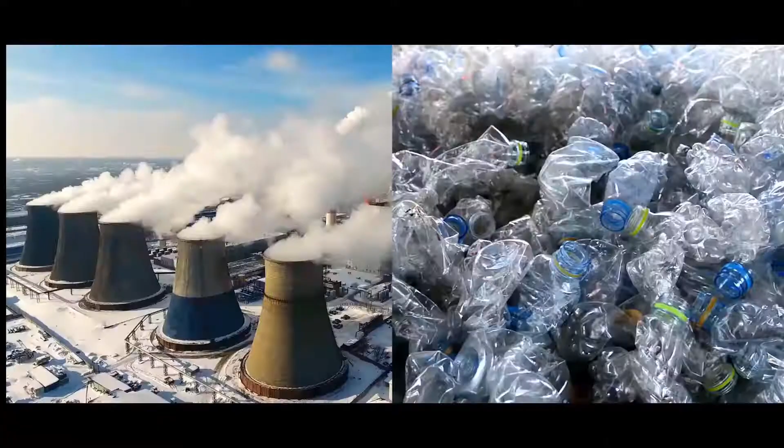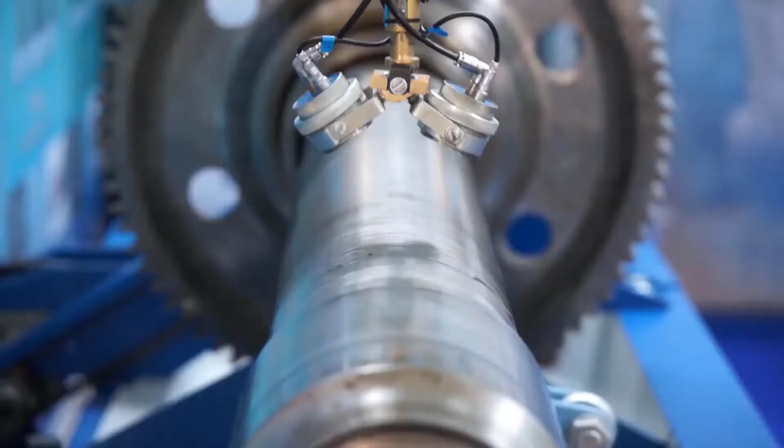Look at the most critical issues facing our planet, what do you see? As a bold, unified One Emerson, we see these issues as noble causes, and within each of them, opportunities to focus our core strengths and unleash new possibilities.

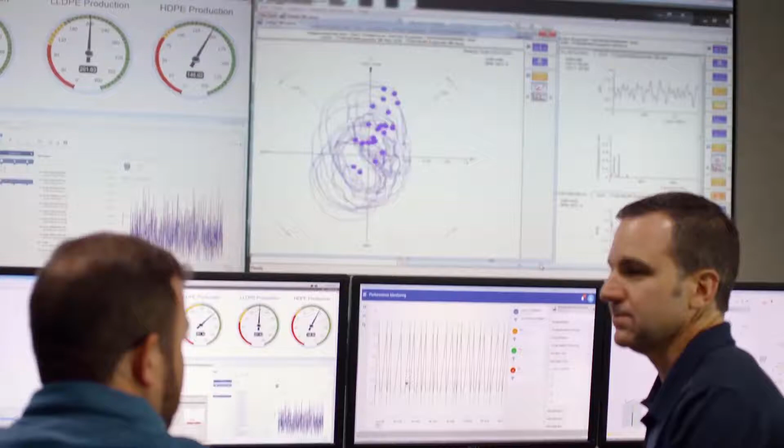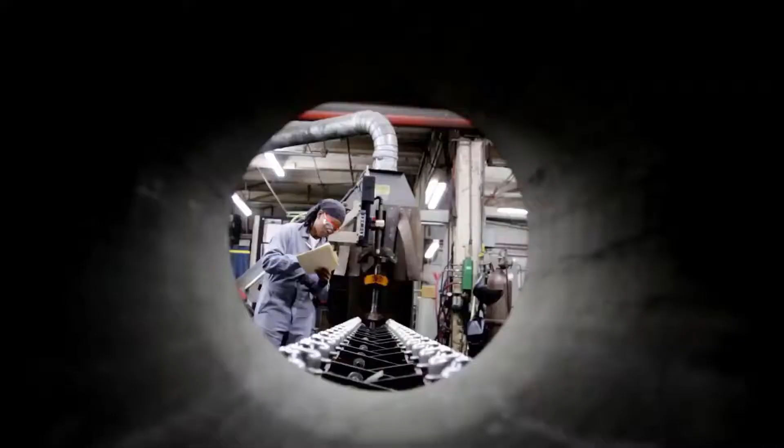With our innovative technology, deep expertise, and ability to deliver practical digital transformation solutions, the success of our Automation Solutions platform is providing real results for our customers while still protecting our planet. We see our most valuable resources being put to greater use, ensuring the performance and safety of industries that are the backbone of daily life.

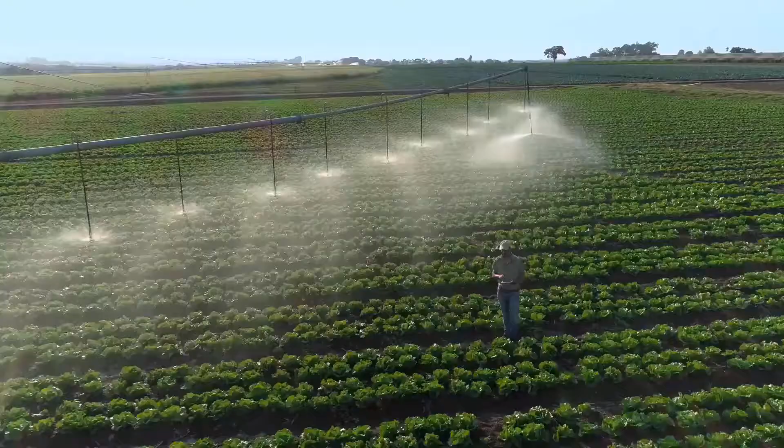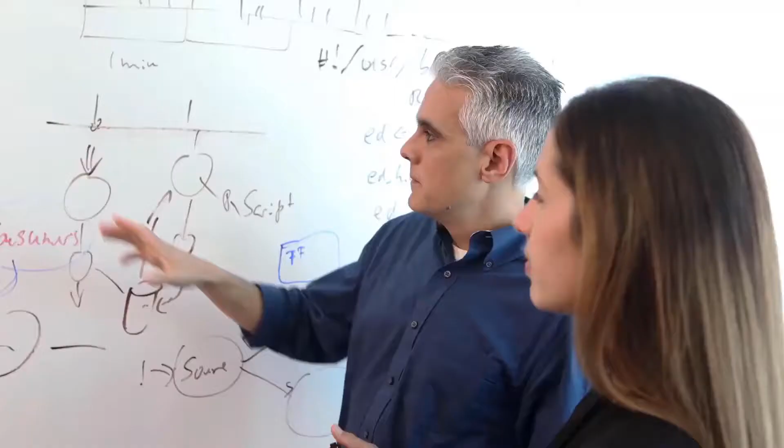From our commercial and residential solutions platform, we will continue to push the boundaries of purpose-driven innovation, identifying new growth opportunities. We see a future where better food quality, sustainable infrastructures, and advanced energy efficiency ensure comfort and health for everyone. As One Emerson, the momentum of our successful transformation into two focused platforms will continue to reshape industries and redefine success for our customers.

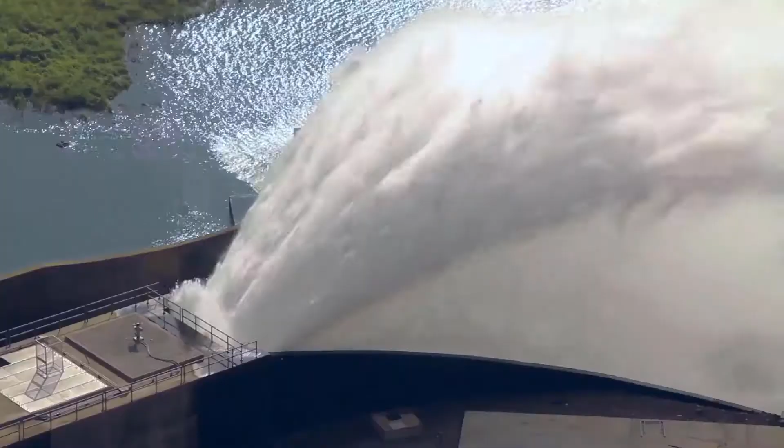We will unleash new possibilities for a future of greater productivity and prosperity, and strengthen our customers' belief that when they partner with Emerson, they can always consider it solved.

Hello everyone, Don Gillis from Emerson. I'm going to be discussing compressor modulation today with you. It's a two-part series. We're going to talk about two-stage, variable, tandems and trios, and also going to get into the digital side of things, okay?

So bear with me, let me take time here to pull my screen up and share it with you. Okay, again I'm Don Gillis with Emerson. This is going to be our virtual classroom. We're going to be talking about capacity modulation today, all right?

A little bit about myself. Again, I'm Don. Joined Emerson in July of 2017. I have approximately 28 years of experience, roughly. I've been an installer, a service technician, a service manager. Obviously I've done some tech support, and I am a full-time HVACR instructor for Emerson.

I am a licensed journeyman. I've served on the Heating Advisory Board for Ivy Tech Community College. I now sit on UNOH Heating Advisory, also on Hi-Point in Bellefontaine, Ohio, and so on and so forth. Most of you probably know, if you're instructors, I've spoke at RSES National Conference a couple times, and as we're doing right now, the HVAC educators, I've done a couple times in Vegas, okay?

Most of you might already know this, the students may not, okay? Some of you instructors, if not all of you, probably already know where I'm headed with this, but I think it's important to point out just a few things about the scroll that I think will make better sense when we get into the modulation part, when I start using some terminology, all right?

All right, so just so you know, I'm not going to go into all the details about the scroll set because this is about modulation, but I do want you to understand some of the moving parts in here. I think it's important for us to have this conversation prior to getting into modulation, okay?

The very top of this is your tips, the sides is your flanks. This is the Oldham coupling, and the Oldham coupling, moving back here, is what keeps this aligned, all right? These notches, all right?

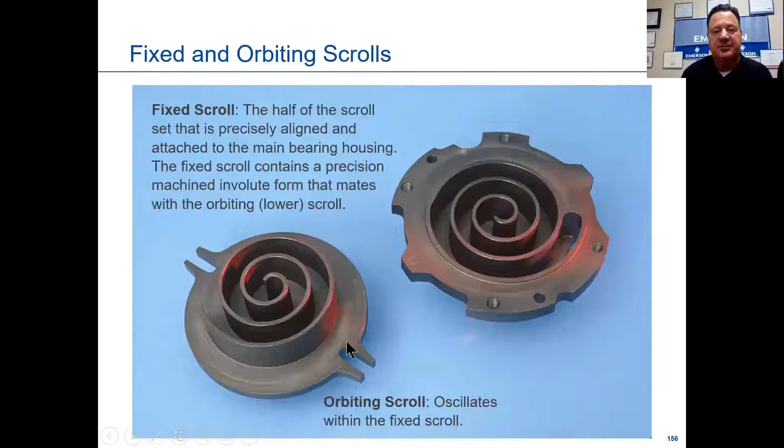And let's say this is the orbiting scroll on these two pegs, this is the fixed scroll on these two pegs. And it basically, not basically, it keeps it from going out of alignment. I'll show you, put this together here a little bit.

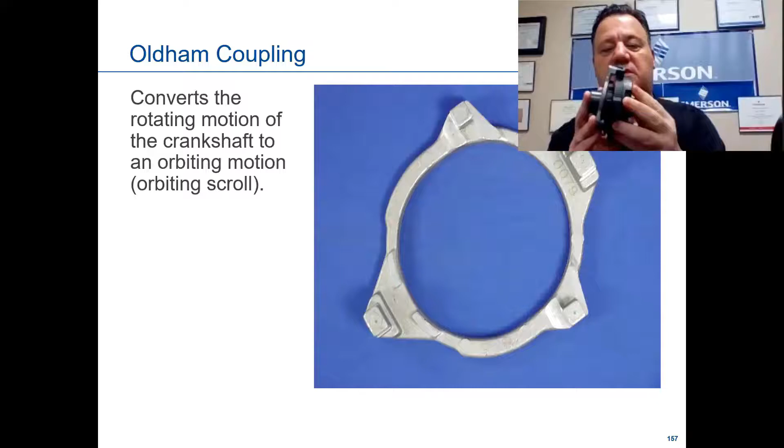Okay, so that's how it looks. I've got the Oldham coupling on these scroll sets, and it's going to go in like this, move around, and compress that gas along those flanks on the side.

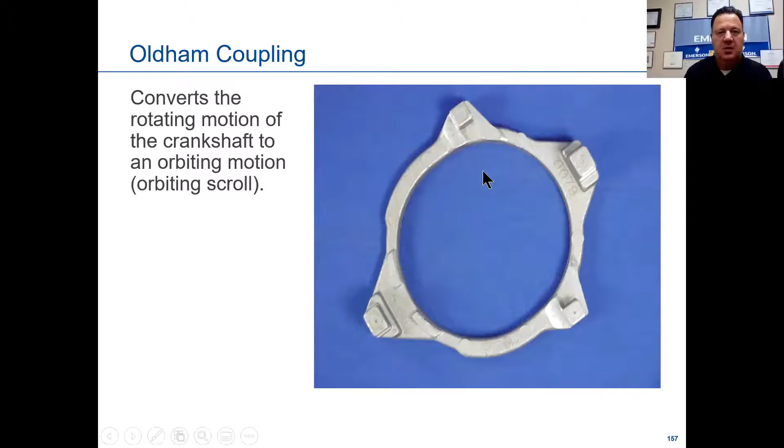All right. This is what we call radial compliance. To me, it's just as simple as saying we're horizontal movement, side to side, and what allows the scroll set to tolerate if you were to get a liquid droplet, if you will.

So it's much more tolerant than, let's say, a reciprocating compressor is. It doesn't mean it will take liquid refrigerant, by no means, but it does help tolerate it quite a bit if in fact it gets inside there.

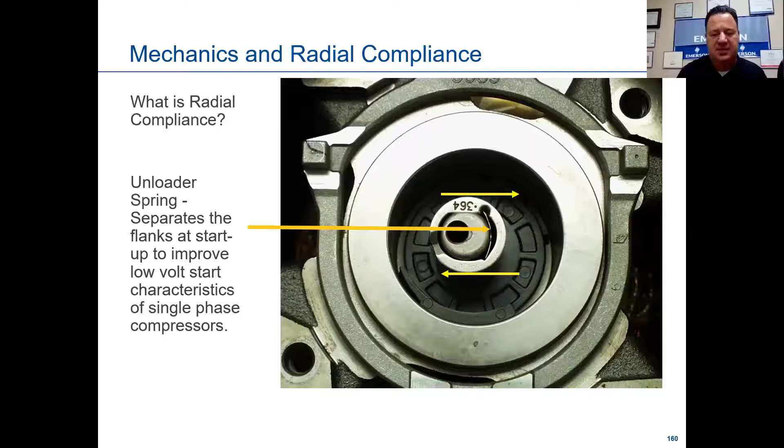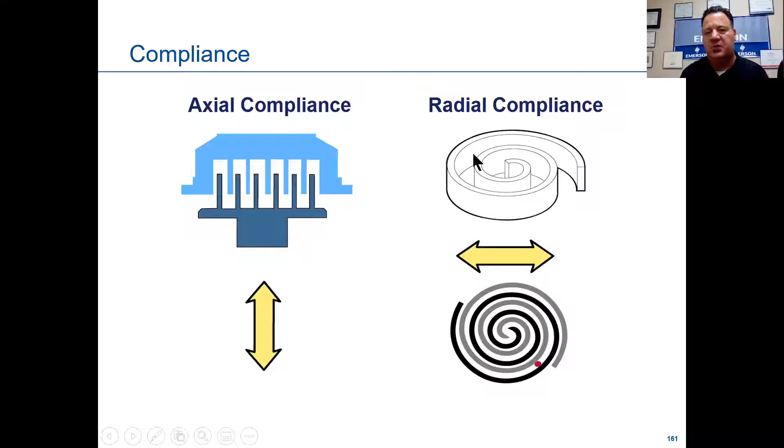This is the radial compliance where I showed you that piece of Swedish steel earlier. This is real important to understand, and this is why I wanted to talk a little bit about the moving parts and just the basic fixed scroll before we get into modulation.

The scroll starts out unloaded, okay? It's a 2-pole motor, runs at 3,500 RPMs roughly nominal. When it starts to load up, as the gas starts to get in, the contactor pulls in, we have a little bleed port here, and as this starts to pressurize on the scroll...

The way this floating seal works - this is a large one on the top of it, and it sits right there on top of that fixed scroll I showed you earlier. The bleed port allows gas to get in that cavity. This is normally sitting on that ledge there.

What happens is 2 things are going on there. It pressurizes that cavity, causing this floating seal to push up on the muffler cap, but it also allows the fixed scroll to go down with the tips of those scrolls touching, okay? That pressurizes it and pushes that 1 millimeter.

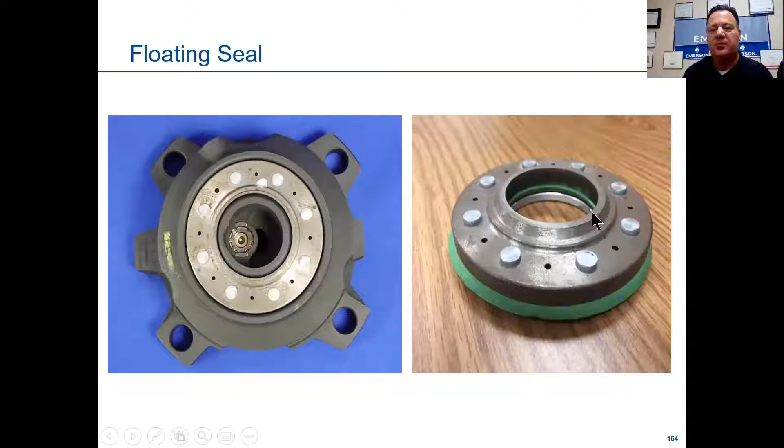This plays an important part because it separates that gas, as we talked about earlier. When this pushes up to that muffler plate, it doesn't allow that discharge gas to go over the top of it, so it isolates it, forcing it to go out the top above that muffler plate and at the top of the scroll compressor.

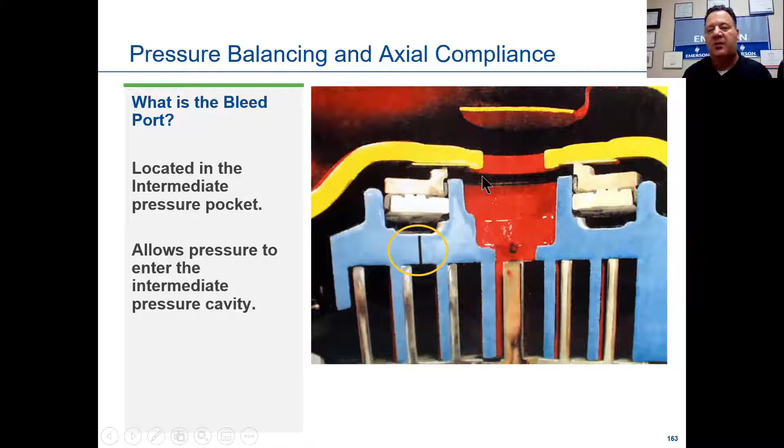If this were to fall down, and I'll get into that later on, this gas would then come around and re-enter that suction gas.

Over here is what we call sleeve guides on the right-hand side. That is allowing that 1 millimeter separation when we load and unload, when we get into digital. When I refer to that 1 millimeter on that sleeve guides, this is what I'm talking about, and we'll get more into that as we move along.

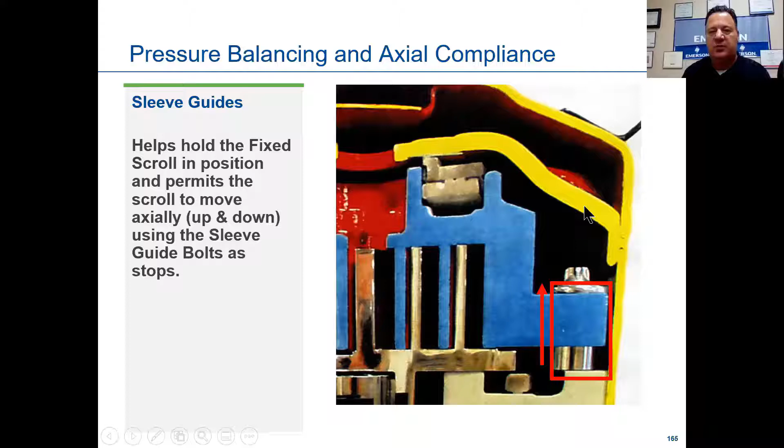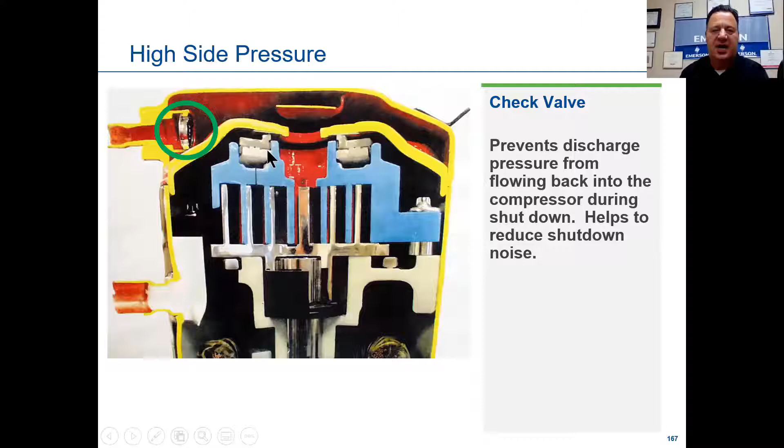This is just showing you a check valve. Most all compressors or scroll compressors have check valves in them. They range from anything inside the discharge line as it moves out, leaving the compressor, to dead center, right in the heart of the compressor at the hottest point of the compressor in the discharge port.

Some may have 2. All right, let's start in with the capacity modulation. We're going to talk about 4 specific modulations: 2-stage, variable, digital, and then multiples, tandems, and trios. All right, let's walk through these here.

So capacity control modulation methods, and we'll walk through each one of these. Two-stage, just a 30,000-foot view here at the beginning, is full capacity - obviously 100%. It is like a fixed scroll, if you will. That will be your second stage at 100%. Obviously, 67% or 65%.

Two-thirds of the capacity will be your first stage, and I'll show you how that works. Then to the top right, we have variable speed, customized scroll with variable frequency drives. We'll talk about the drives and how that works, because that's the one really catching on a lot in the industry right now.

I foresee that being a big major player, as it did with mini splits years ago. Then at the bottom left, we have digital, mostly seen in refrigeration, can be used in air conditioning too.

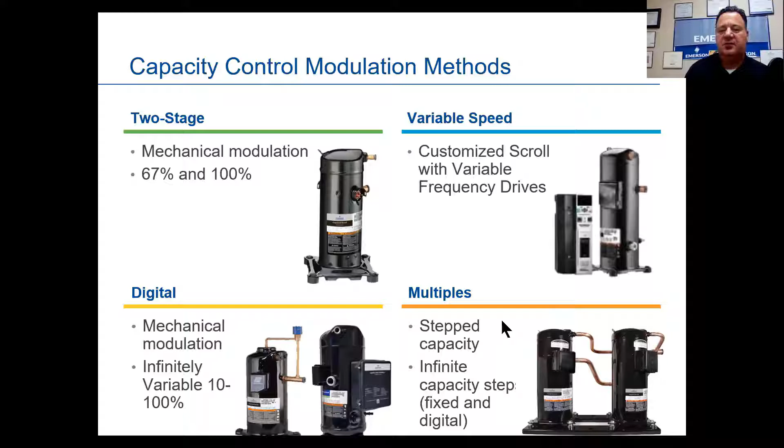Then we have multiple tandems or trios. It's a step capacity, infinite capacity steps, fixed and digital. So you can have two compressors. They don't have to be the same size, or even the same model. They can be different BTUs and different tonnage. So we'll walk through those.

Now, this is just a snapshot of the compressor modulation technology comparisons. I'm not going to spend a lot of time on this because it's more salesy marketing. I do show this in class, but it's really to give technicians an idea of what that might look like if they're quoting equipment.

So we have our fixed scroll. We talked about that a little while ago, just the anatomy pieces of it. We have the modulation technology on the top left, our products, the range, what horsepower they come in, the part load efficiency, full load efficiency, and what that looks like with comfort. Then we have our applied cost.

So again, we start out with fixed. We then have two-stage, digital from 10 to 100%, variable speed, and multiples. Now none of these compressors, with the exception of variable, have a pump for lubrication inside them. So that's unique to that.

If you're teaching scrolls, at least the Emerson scrolls, we do our lubrication basically by physics. We manipulate the shaft and different things in there and apply that lubrication up through the shaft simply by ramping up the 3,500 RPMs that a fixed scroll has.

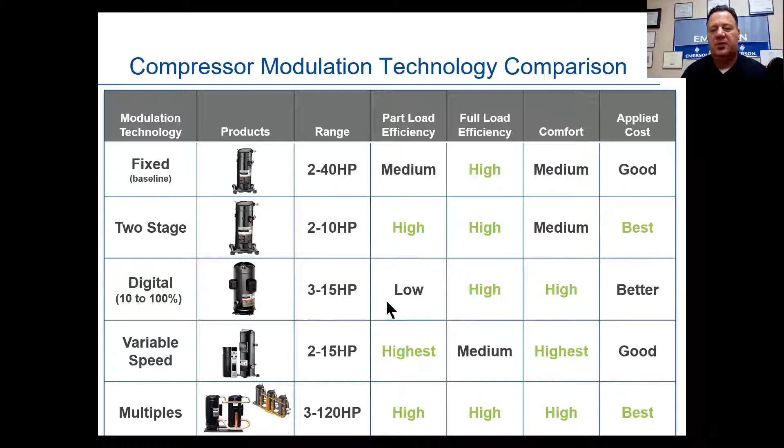The next one that I really think is a great technology, especially in refrigeration and air conditioning, that's catching on quite quickly is the digital. We unload and load that compressor. We don't necessarily shut it off. I'll talk a little more about that in a bit.

All right, the first thing we're going to talk about is our two-stage. Again, we're talking about 67, 65%. The reason I say 67, 65 is that on some videos Emerson's made it will say 67%, and some presentations I've seen will say 65%. Neither one is wrong. Just remember, first stage on a two-stage compressor is going to be about two-thirds capacity, so the 100% is like a fixed capacity, and partial capacity, or first stage, is going to be about two-thirds of 100%.

All right, so Copeland scroll two-stage, you can see how this is working. It's a module, if you will. Mechanically unloading compressor operates at 67% to 100%. It utilizes a three-way solenoid valve to pressurize the lift ring. In fact, I'm going to show you, this is part of that ring I was talking about at the very top.

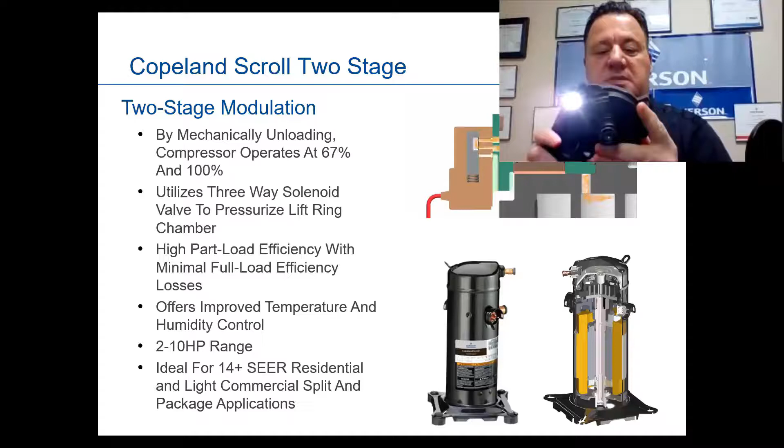I don't know if you can see this or not, let me try this again. You can't really tell, but there are three little holes in the top of the fixed scroll. There you go, you can see my light coming through there. There are three little bleeder holes on both sides, in the intermediate area of that fixed scroll. See my flashlight shining through there? Two little bleeder holes, so when those are at the very top, you can see it.

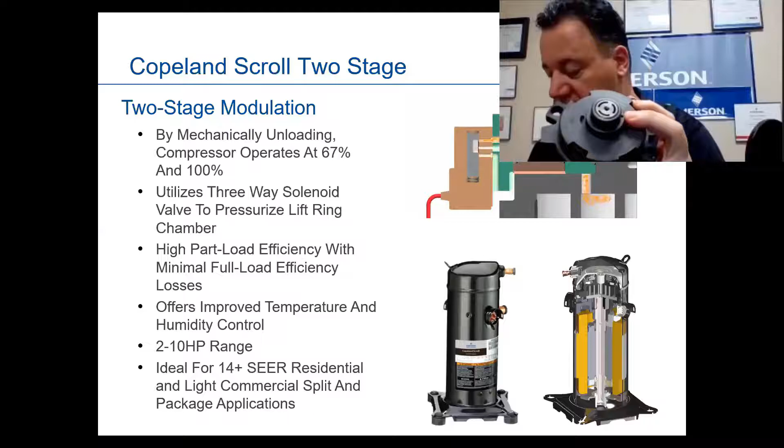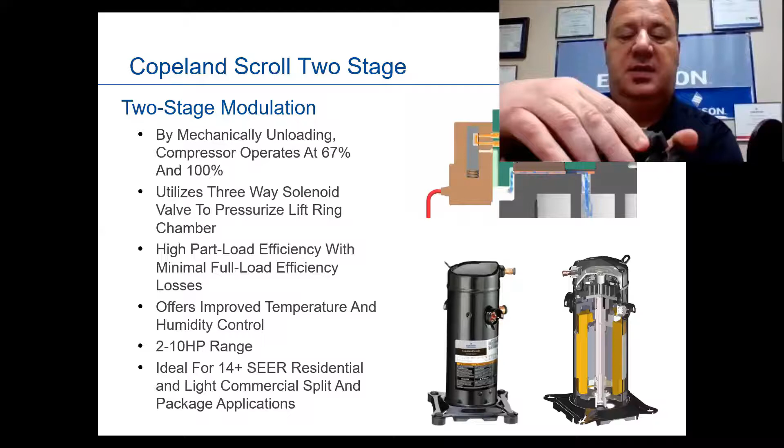High part load efficiency with minimal full load efficiency losses offers improved temperature and humidity control in the 2 to 10 horsepower range. Ideal for 14 SEER and above residential and light commercial split and package systems.

You see a lot of two-stage out there in residential and light commercial. For the most part, I haven't been gone all that long in the field, and two-stage is something most technicians are fairly familiar with. Do they know how to troubleshoot it? That might be a different story. I don't know, but they understand the concept of it.

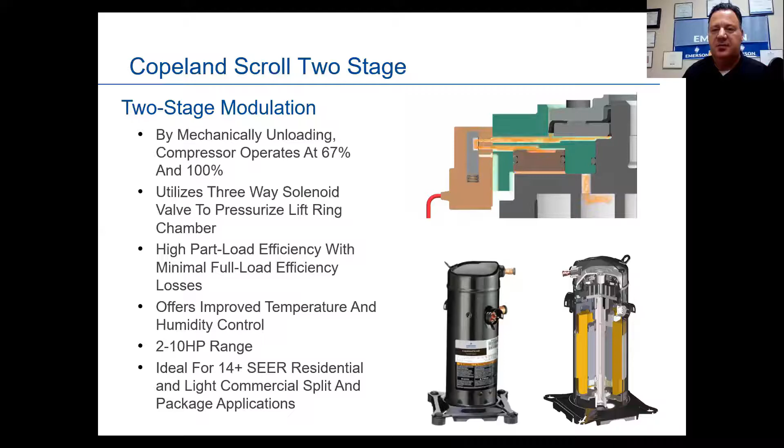Now, the Copeland Scroll two-stage modulation operation, at the very top, I'll start up here. Again, you're powered up. Now we're blocked off, we're at 100%, or here we're at partial. We energized, blocking it off. Now we're at full capacity. Here we're at 67%, you can see it's bleeding off.

Over here on the right, partial load operation: intermediate cavity pressure communicated to a lift chamber via a three-way valve. The valve is de-energized when we go into that first stage, as we talked about earlier. You can see that lifting up, that lift ring, that three-way valve lifts it up, and those bleed ports I showed you earlier in that medium cavity—here's the low, medium, and high pressure cavities—will bleed out from both sides. Modulation ring moves up, opening the bypass.

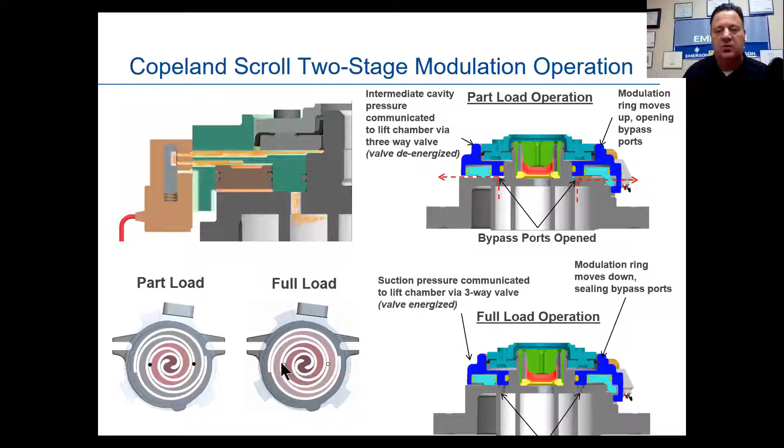At the bottom, you'll see full load operation, suction pressure communicated to the lift chamber. The valve is energized now at full capacity, at 100% or fixed capacity. You can see the bleed ports down here at the bottom on the left. Partial load, when it shifts, those open up. You can see at full load, those ports, if you will, are blocked off.

Here's our module. Now we're going to talk about multiples—that's tandems and trios. All we're doing is taking multiple compressors and mix and matching them. They could be uneven or even—in other words, they could be the same capacity on both compressors, or the trios could be the same capacity, the same BTUs, horsepowers, or they could be mix and match. They could have a digital on them. So there are all different opportunities here to best fit that application.

Let's take a look at this. This one is the easiest one to comprehend, because all you're really doing is matching up the load with multiple compressors.

What is a multiple? It's a pairing of two tandems or three trios, fixed speed and/or mechanically modulated scroll compressors, variable speed, digital two-stage compressors, to achieve capacity modulation. Multiples allow modulation of compression capacity while maintaining efficiency and potential reduction of cost, and you see a lot of this in commercial applications, some refrigeration applications. Very good stuff—won't see things like this in residential, obviously, but there is a place for it, and we sell a lot of these.

The only thing I want to point out to you, if you're an instructor and you're planning on teaching this, or at least touching on it, the thing I like to drive home when I'm delivering this out on the road is be aware that there's going to be multiple model numbers. Each compressor is going to have a model number, and the sled, the trio, or the twins will have a model number themselves. Either the tandem and the trios will have a model number, and that's crucial when you're ordering, to get the right model number.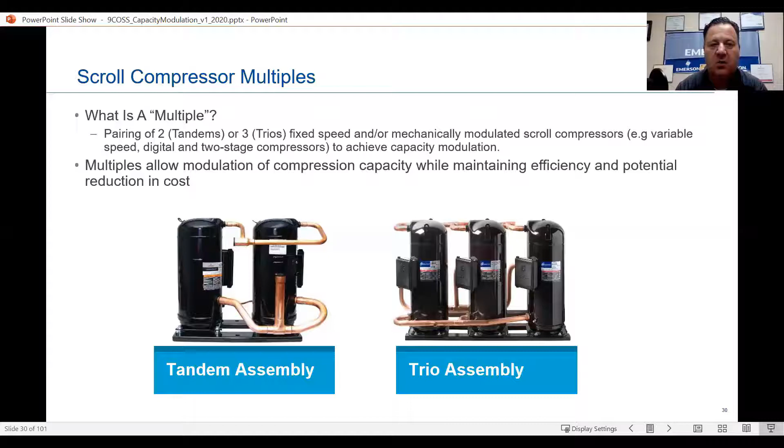Advantages of compressor multiples: efficiency and economical—high system efficiency at both full load and partial load, possible reduction of applied cost through reduction in number of circuits in the HVAC-R system. Flexibility—versatile compressor combinations to meet targeted part load efficiency points. Oil management—no auxiliary oil management hardware needed. Load matching, as they all are in modulation—that's basically the whole concept of matching the load. Stepped capacity modulation for higher part load efficiency levels.

You know, we talk about two-stage. The nice thing about two-stage, where it's a good fit, is you do not need any type of special third-party control of any sort. You simply need a two-stage thermostat and you're good to go. So that's one of the benefits in that application.

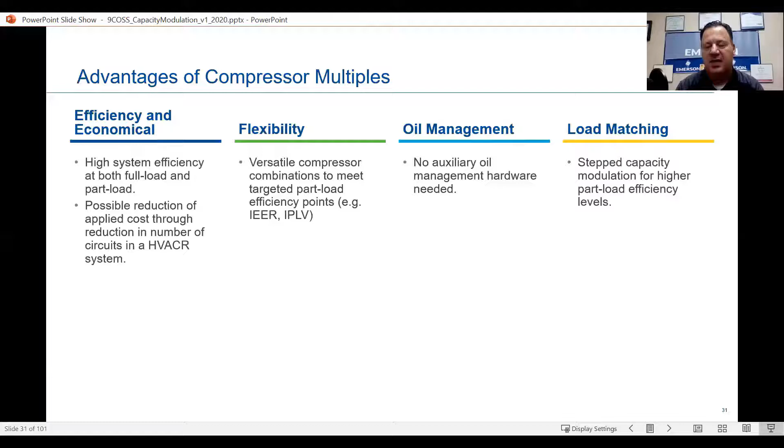Scroll compressor multiples development and qualification. First, we design them. We oil balance test them. We strain gauge test them, and do reliability testing. So what does that mean to you?

The contents on the design: manifold layouts, analytical studies, FEA, cost assessment. The oil balance testing, we lab test them.

We do design verification, performance studies, all kinds of testing go into that, whether it be sound or durability. They have a shake table, strain gauge testing, lab study for the tube stresses. What I was just talking about, they call it a table stand. They'll put it on there and simulate that it's driving down the highway on a semi.

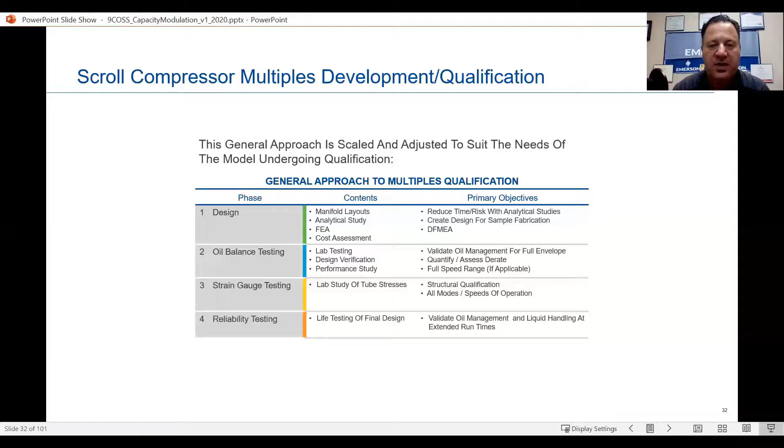Reliability testing, life testing, final design. You may or may not already know this, but we test all of our compressors, no matter the model or type, to last at least 15 years minimum. That's thinking you're keeping them inside the envelope, okay? So if you've got a matted condenser coil for 2 years or a whole summer and it's running at high head pressure, that's not necessarily going to be in that envelope, correct? So we shoot for 15 years minimum on all our compressors.

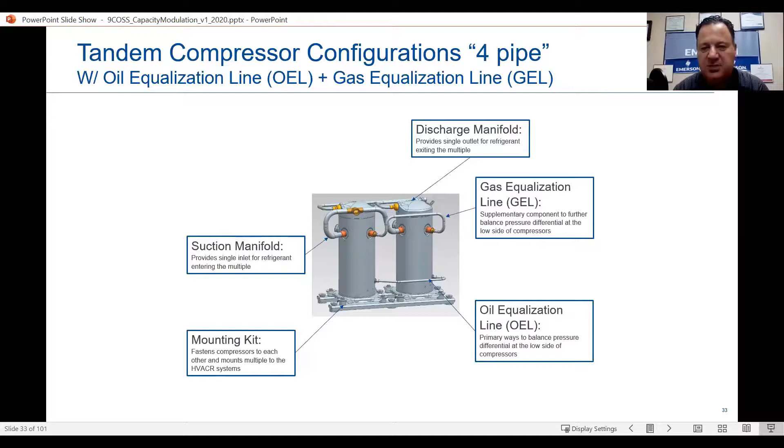So this is the older concept, called the four-pipe system, the tandem compressor configuration. It has the oil equalization line, or OEL, plus gas equalization line. We've got the discharge manifold, suction manifold, the mounting kit, and the gas equalization line, a supplementary component to further balance pressure differential at the low side of the compressor. And then we have the oil equalization line, the primary way to balance pressure differential at the low side of the compressors.

Now look what we've done here. We went into the multiple configurations and parts added to the compressor with a two-phase tandem. Here we have a two-phase tandem, unlike the four-pipe, with the two-phase tube, or TPTL, a secondary way to balance pressure differential at the low side of the compressors, and it connects to the sight glass of the compressors, okay? And then we still have the discharge side up here, and of course we'll have the mounting kit and the suction manifold.

Again, if you are in a position where you change out one of these compressors, if that service ticket allows you to, and not have to change out the whole tandem, be very aware that there's a lot of engineering that goes into this connection between these two compressors. I would suggest not to try to fabricate that yourself. The reason being is sound.

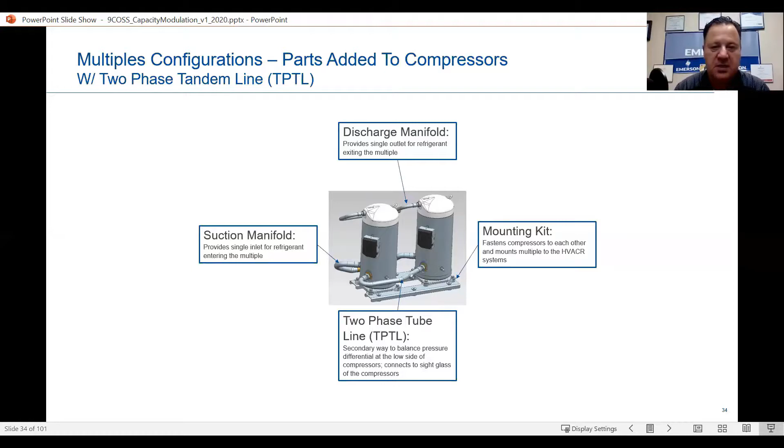This is an actual part itself that you can order along with that. So when you're ordering through the wholesaler, make sure you're aware of that. I'm talking to you like you're a contractor now, because that's the way I normally teach, but you're an instructor. All of you are teachers, but you get the gist of it. Be very, very aware of that. This is for your own personal knowledge.